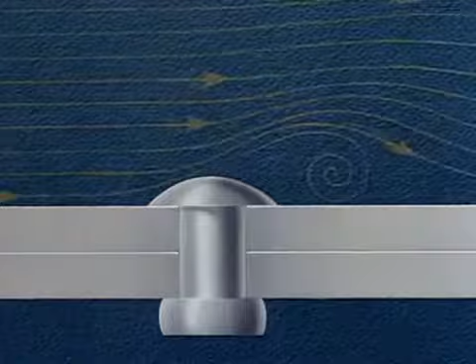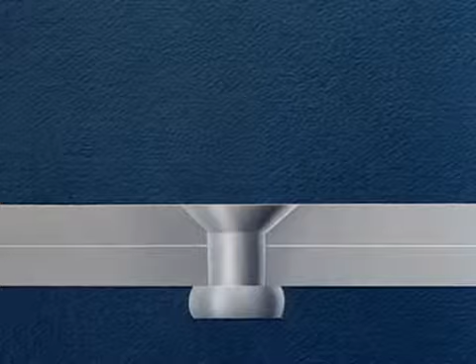With the ever-increasing demand for greater speeds in aircraft, it has been necessary to remove every possible projection from the outer surface of the airplane. Everything that would induce turbulence with its attendant drag must be reduced to a minimum. The use of a rivet, whose head is flush with the surface being riveted, eliminates the drag of the ordinary rivet head and thus aids in accomplishing our higher speeds.

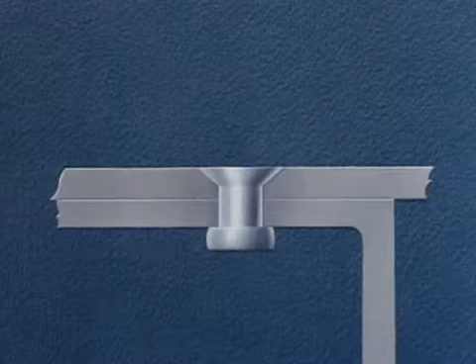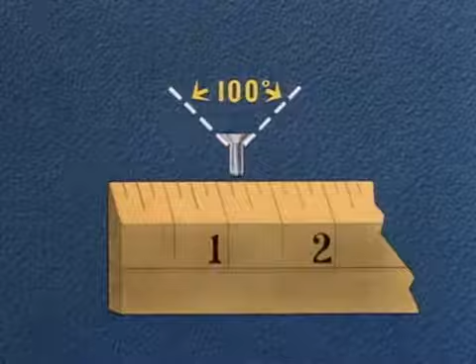The choice of method to be used in flush riveting is based on the thickness of the sheet next to the manufactured head. Let's assume we're driving a rivet 1/8 inch in diameter with a 100-degree countersunk head. Probably the best production method involves sheets of 40 thousandths thickness or greater.

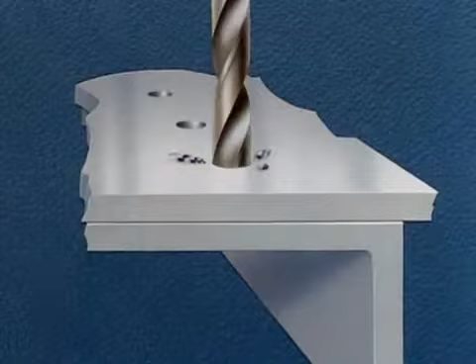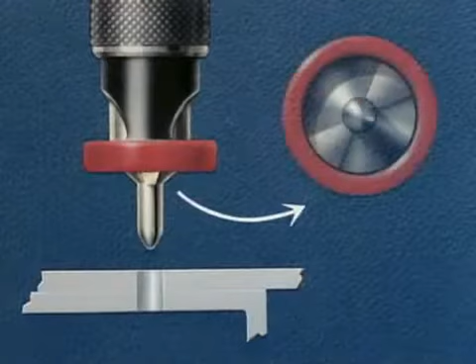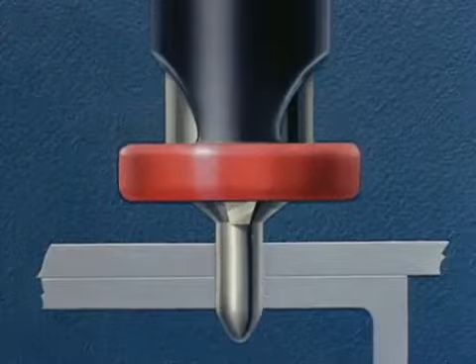We start with the assembly of the sheets, drilling the correct size hole for the given rivet. We're using a 1/8 inch rivet, so we drill a number 30 hole, then countersink, using a special countersinking tool with a 2-flute cutter and a 100-degree cutting angle and number 30 pilot. Unless specific approval has been obtained from the stress engineer, the countersinking should not go through the first sheet. If sheets are properly clamped during countersinking, it is not necessary to disassemble them for deburring, which is a costly operation.

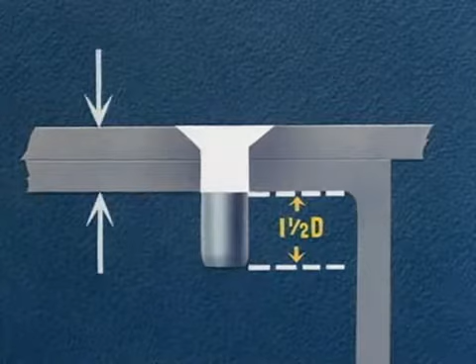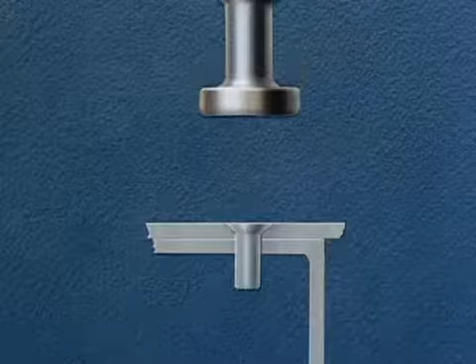Next, we insert the rivet, the length of which has been determined by adding 1 1/2 times the diameter of the rivet to the grip. The grip, as shown here in white, is equal to the total thickness of the material being riveted. A vibrating type air gun with a flush rivet set and a regular bucking bar may be used. Ordinary riveting technique will do for driving of this type rivet.

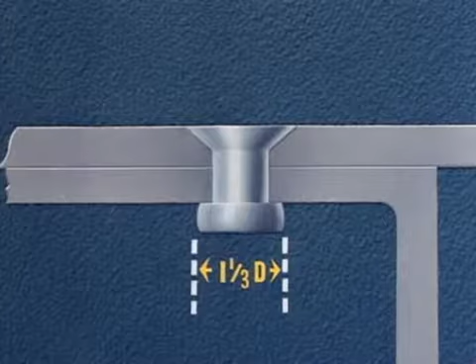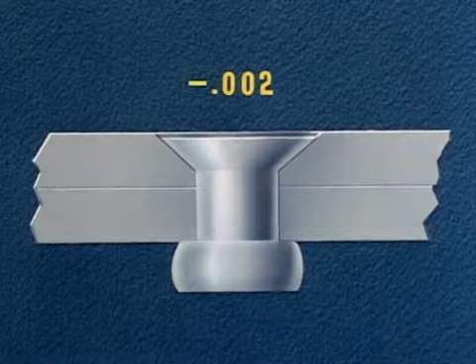The finished rivet should have a formed head, 1 1/3 times the diameter of the rivet and about 1/2 the diameter high. The flushness of the rivet, as determined by aerodynamics, must run in the neighborhood of plus or minus 2 thousandths. We have just demonstrated the countersink method of riveting. This is a method used when both sheets are over 40 thousandths in thickness.

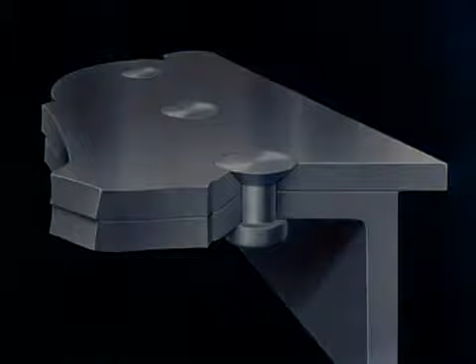Structural requirements make it necessary to dimple the sheet next to the manufactured head if this sheet is under 40 thousandths in thickness. This double dimple method is used for flush riveting thin sheets.

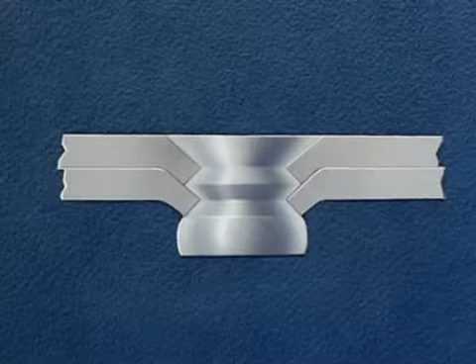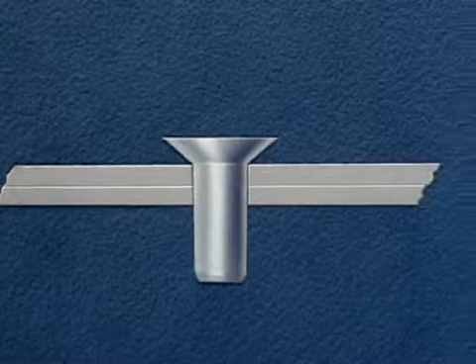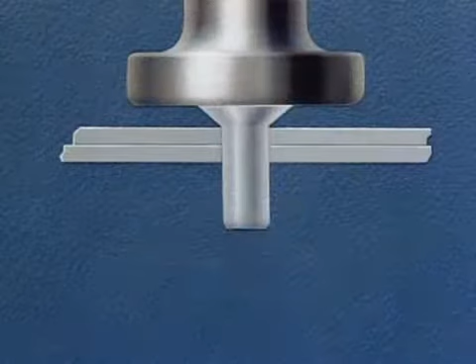Here again, we start with the number 30 hole and follow this with insertion of the rivet. The length of the rivet is again the thickness of the material plus 1 1/2 times the rivet's diameter. The driver uses a standard flush rivet set. The bucker uses a special dimpling set that has been adjusted by the tool department to give the correct angle and depth of the dimple.

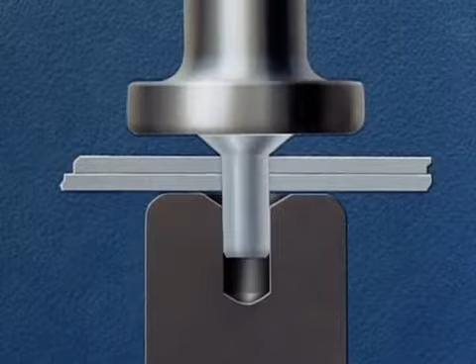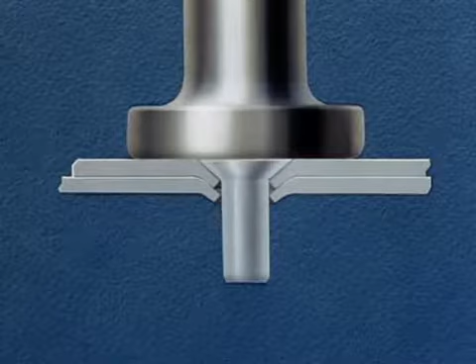Using the rivet as a punch, we dimple the two sheets together into the dimpling set. The special dimpling set is removed. The driver retains the standard flush driving set. The work then proceeds with the bucker using an ordinary bucking bar.

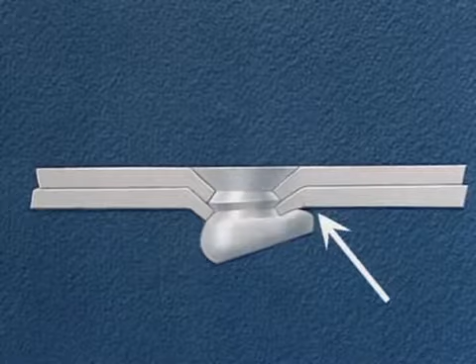Driving this type of rivet requires greater skill than was required in the previous method. Any clinching or offset of the rivet will cause the dimpled edge to crack. The rivet must be driven straight. We have just shown the double dimple method of riveting. This is one of the methods used when both sheets total 40 thousandths or less in thickness.

A third method, used for riveting slightly heavier gauges than in the last method, involves separate dimpling of the sheets. Again, we start by drilling our number 30 hole. The sheets are then disassembled and machine dimpled separately on the squeezer.

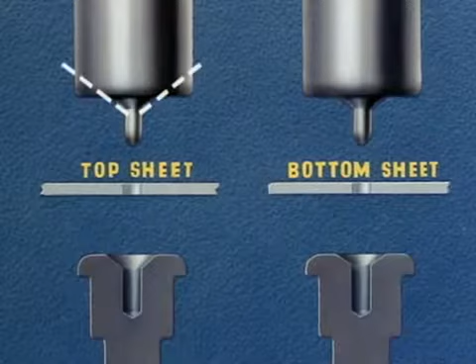Note the angle of the dimpling tools. The dimpling punch for the top sheet has an angle of 100 degrees, the same as the rivet head. The dimpling die has an angle of 110 degrees. The dimpling punch for the bottom sheet is also 110 degrees to correspond with the top sheet, and the dimpling die is 120 degrees. This difference is necessary to get good nesting of parts.

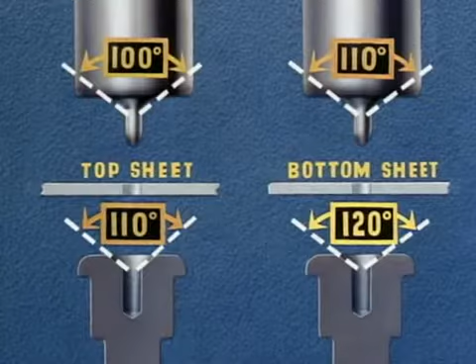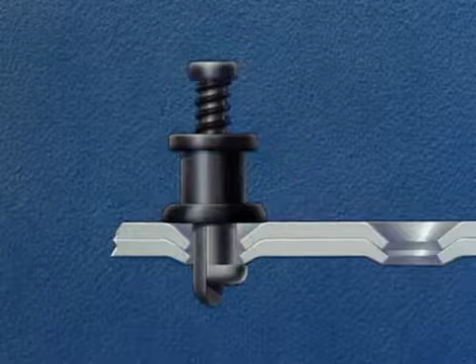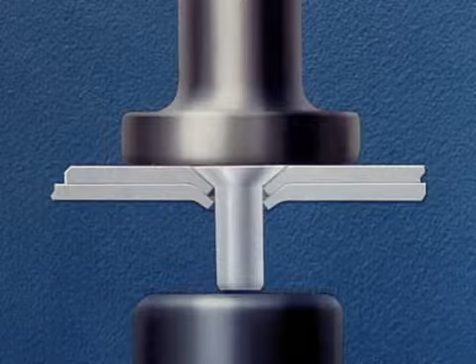Upon completion of the dimpling operation, the parts are reassembled. Sheet metal riveting clamps are used to hold the parts together until riveting is completed. The rivet is inserted, and from here on the work proceeds using a regular flush riveting set and the ordinary bucking bar. Driving this type of rivet requires the same skill on the part of the operator as in the former dimpled method. It is very important that the rivet be driven straight.

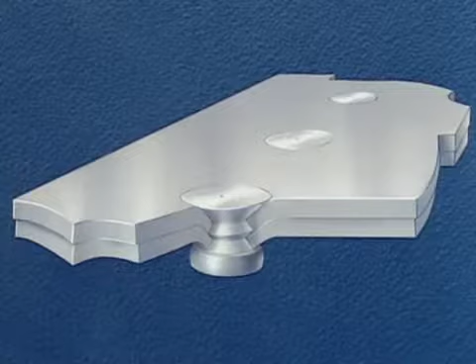We have just illustrated the pre-dimple method of riveting. The sheets were taken apart and machine dimpled separately on the squeezer. This is a method used when the sheets are too heavy for the double dimple process.

For sheet gauges where the top sheet is too thin to countersink and the bottom sheet too thick to dimple, we must use a combination of pre-dimpling and countersinking. The top sheet, being under 40 thousandths, must be dimpled. The bottom sheet, being over 40 thousandths, will be countersunk.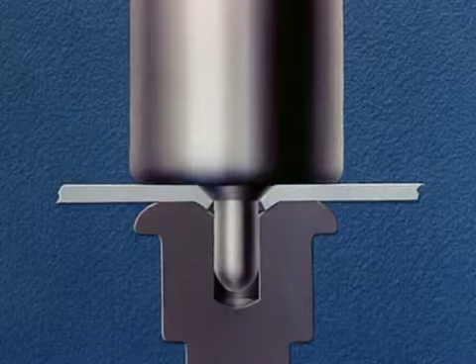Again, we start by drilling a number 30 hole. Sheets are disassembled and the upper sheet is machine dimpled using special dimpling tools on a squeezer-type machine. The bottom sheet is countersunk using the special countersinking tool.

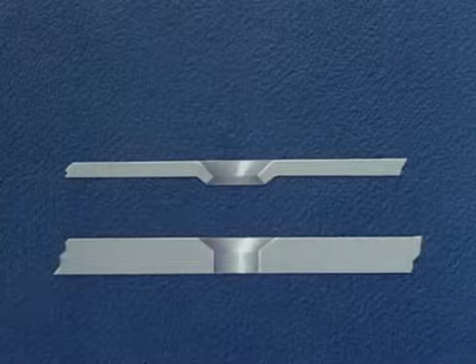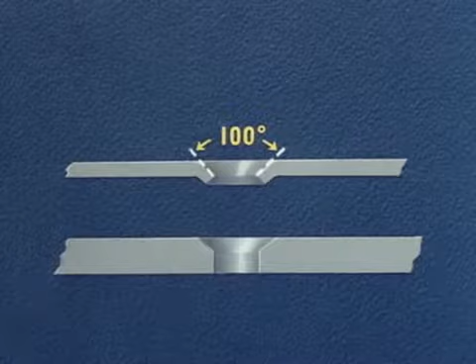The angles of the dimple and countersink are very important. The angle of the dimple next to the rivet must be 100 degrees because the rivet head is 100 degrees. The angle on the opposite side of the sheet is 110 degrees. The angle of the countersink is also 110 degrees.

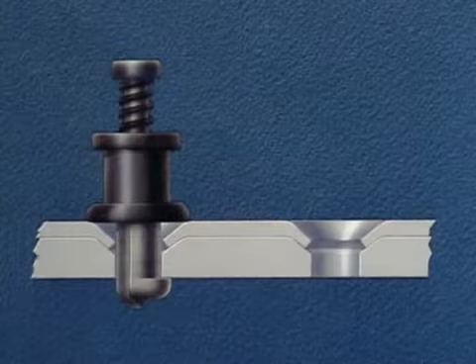Parts are reassembled using sheet metal clamps. Rivet is inserted. This is followed by driving the rivet using a standard flush driving set and bucking bar. This riveting technique is fairly simple because there is no lip on the under sheet to cause cracking or failure from clincher rivets.

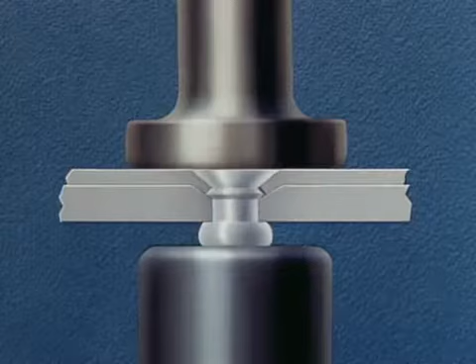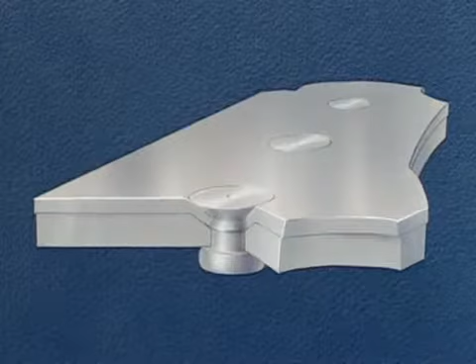We have just demonstrated the combined countersink and dimple method of flush riveting. This combination is used in cases where the sheet next to the rivet's manufactured head is too thin to be countersunk and the bottom sheet is too thick to be dimpled.

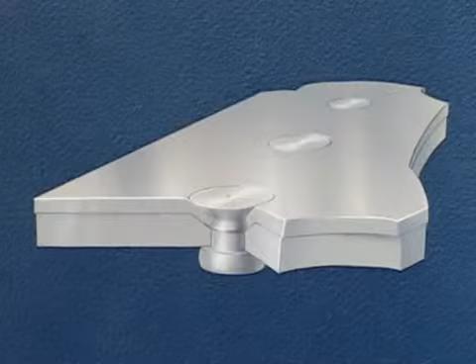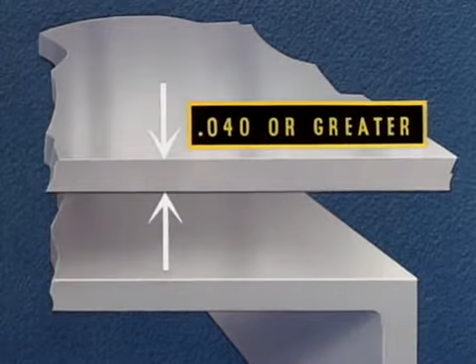Now let's review the four methods of flush riveting just demonstrated. Countersinking, used when the top sheet is 40 thousandths thickness or greater. The flushness of the rivet is obtained by setting it into a hole countersunk by a special tool.

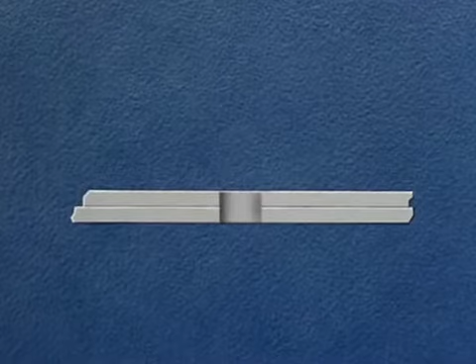Double dimpling, used when the total thickness of the sheets being riveted is 40 thousandths or less. In this method, the flushness of the rivet is obtained by using the rivet itself as the punch to form the dimple.

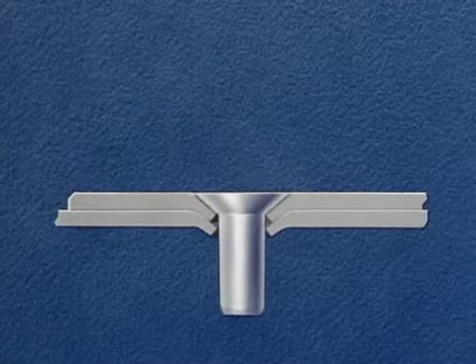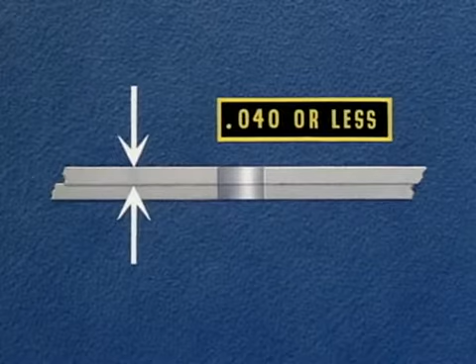Pre-dimpling, used when the top sheet is 40 thousandths or less, and the total thickness of both sheets is over 40 thousandths and under 90 thousandths. The flushness of the rivet is obtained by setting it into a dimple formed mechanically on a squeezer.

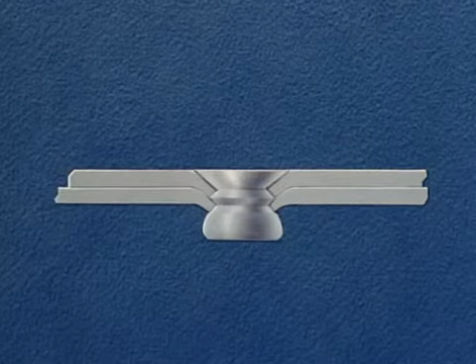Combination countersinking and dimpling, used when the top sheet is too thin to countersink and the bottom sheet is too thick to dimple. The top sheet is dimpled and the bottom sheet is countersunk.

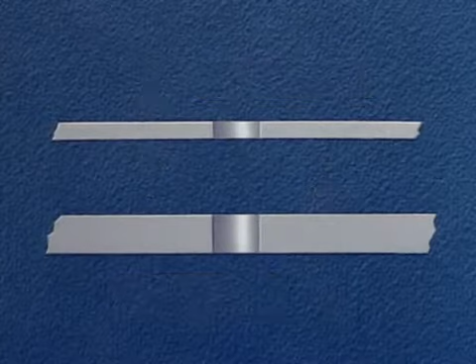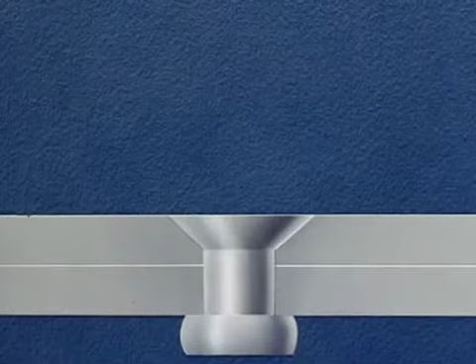The result obtained by each of these different methods is the same. The head of the rivet is flush with the surface so that the turbulence or drag is held to a minimum.